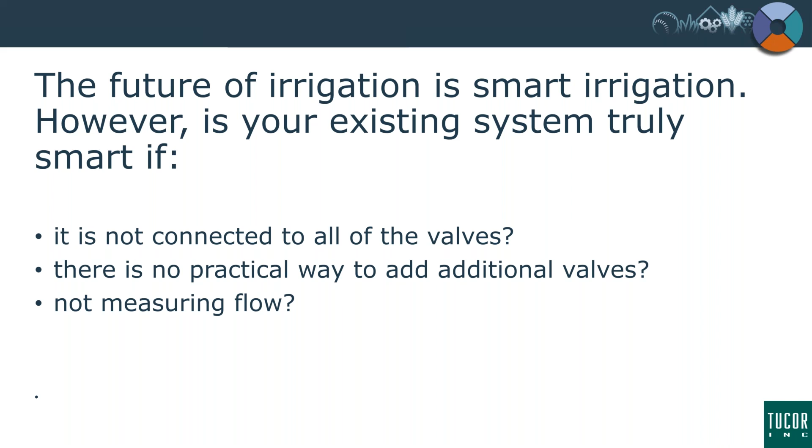What if it's not measuring flow? How smart truly is your smart system if you can't provide against leak detection, if you can't totalize the amount of flow that you're using on a daily, monthly, and annual basis? What if it's measuring flow, but not a high enough resolution at low levels for leak detection? With today's advancement of technologies of the drip and some of these new systems with drip with filter fabrics on them, some of the lower flow emitters, certainly drip systems and green roofs, low-level leak detection is becoming more and more of a concern. And what if you're not able to check the low leaks?

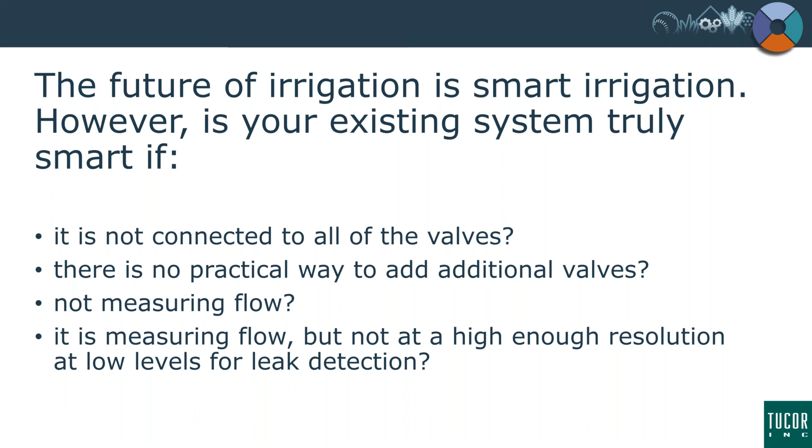So these are the things that we're going to address today. These are the things that Tucor has been working on. Everything from the controller out to help make the controller smart. So let's talk about this. We have 4 general categories that we're going to address today. We have the hybrid 3D system. We have the Nexus Wireless system. We have a new product that we're just introducing to the market currently. It's called the Tucor MultiFlow. And then the 4th category, which we're just finalizing right now, is the FMV, or Flow Meter Master Valve Retrofit Assembly. So let's take a look. Okay.

We have the hybrid 3D, a product where if you have just one good valve, one good wire in the system, we can add our hybrid 3D at your control system and use that existing wire, sharing the field common and adding valves anywhere in the existing irrigation system. Not only can we add valves from that valve box out, but we can connect to a master valve and flow sensor and bring the data back to your controller, all without having to run wire from the controller.

So we have 3 categories. New for us this year is our 3D2, a kit just for master valve and flow. The 3D6 provides for master valve and flow as well, but also allows you to add up to 6 valves in the landscape. The 3D24 again allows for master valve and flow control, but allows you to add 24 valves into the landscape, helping complete systems you couldn't get wires to in the past.

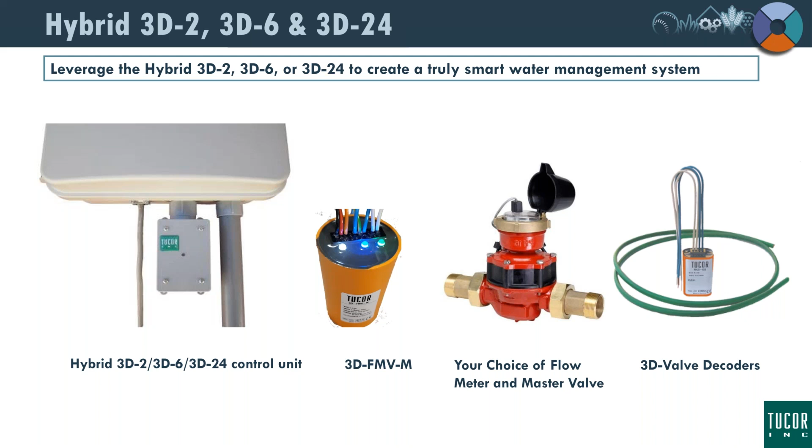So we still need to control that valve. So we give you an assembly that has all of these components.

Our first component, totally new for us this year, is what's called our hybrid 3D FMV Assembly. It comes as a complete kit, with the splices, the transition valve decoder, the combination decoder, and the 3D board itself.

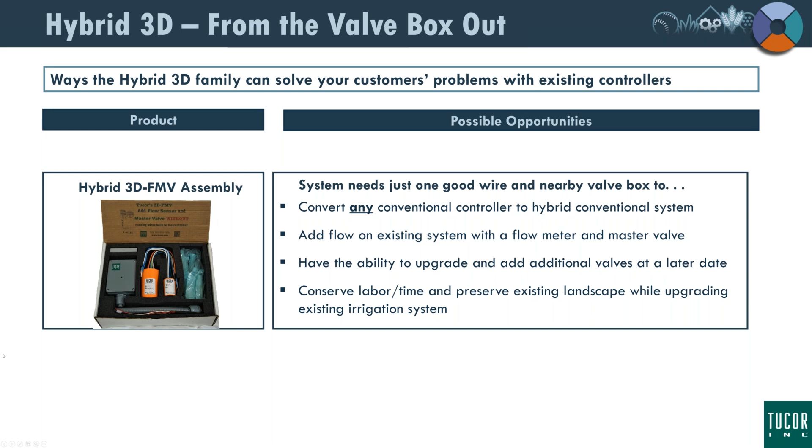There are 2 ways to mount it. One is what's called a snap track, which allows you to hook a raw board to the wall or the interior of your cabinet or controller. Or you can mount it in this IP rated enclosure, and we have a flex conduit that can be cut to any size to fit the application. So that all comes to you as a kit.

The 3D FMV Assembly is shown here in a package that comes in the box, with instructions on the box itself for use.

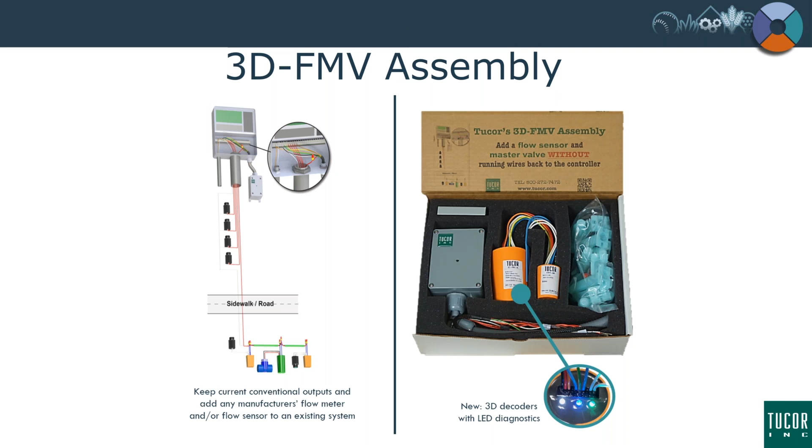We have the 3D6 and the 3D24. Sometimes you don't need to add flow meters and master valves, but just want to add additional valves to your system. Oftentimes I've had as many as 2 of these placed on a controller just to add valves where needed.

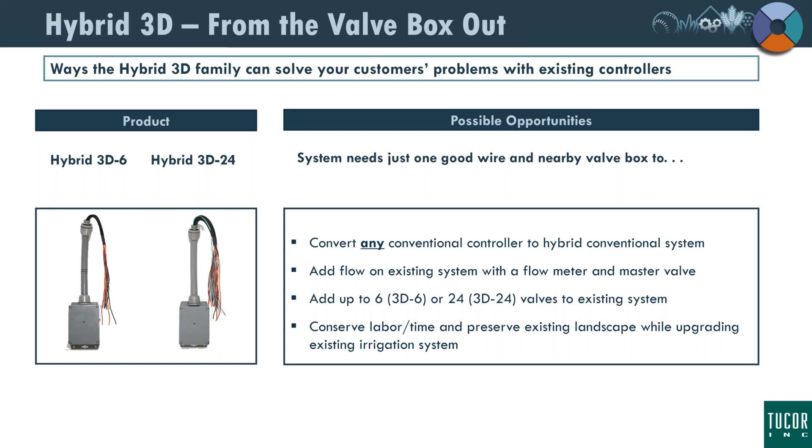So this is kind of a layout, a configuration that shows a typical application. Number 1, what we're showing here is adding a combined flow sensor and master valve by using the existing wires. Here's the controller location. We have all the existing wires to the existing valves. We come down to this last valve because I want to put a flow meter and master valve at the point of connection.

So we end up going to the transition valve right below in this area here. We transition that wire by putting a decoder there. So that valve now has to have a decoder talking to that solenoid, and then we can add a master valve and flow sensor to the system.

The second scenario: we're eliminating a broken wire. I've got one good wire crossing into this median to this island. One wire is broken. All I have to do is go to the valve that's got the good wire, put a transition decoder in, and then add as many valves as I would choose at that point.

We have the ability, if you want—as in this example, assuming your controller has the ability to work independently with an independent schedule that doesn't have influence with the rain shutdown—to actually run lighting features and so forth off of your controller as well, by extending the 2-wire path to it.

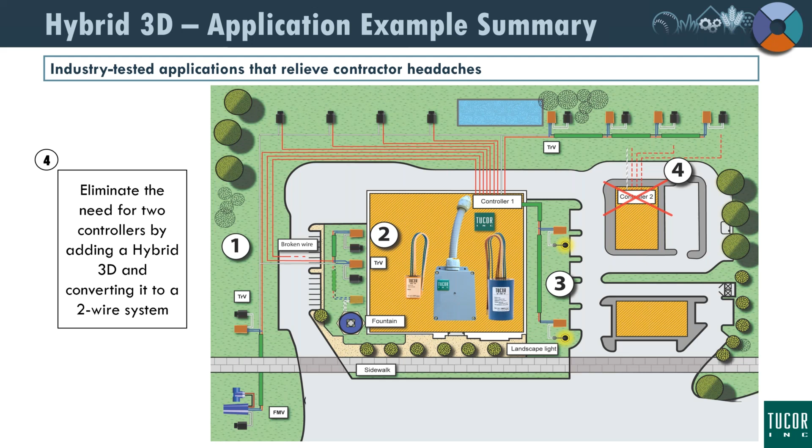In this project, villages in San Jose, they put in 109 of these, and it saved them thousands of dollars in trenching and boring. So that's a perfect example of how you can resurrect projects that otherwise wouldn't be feasible to do.

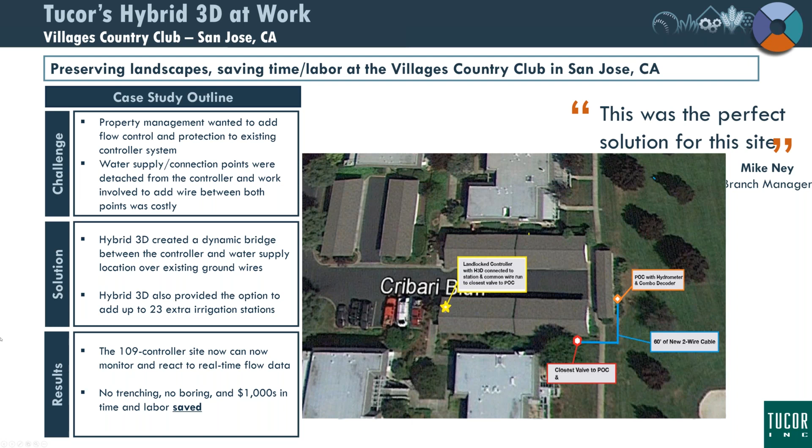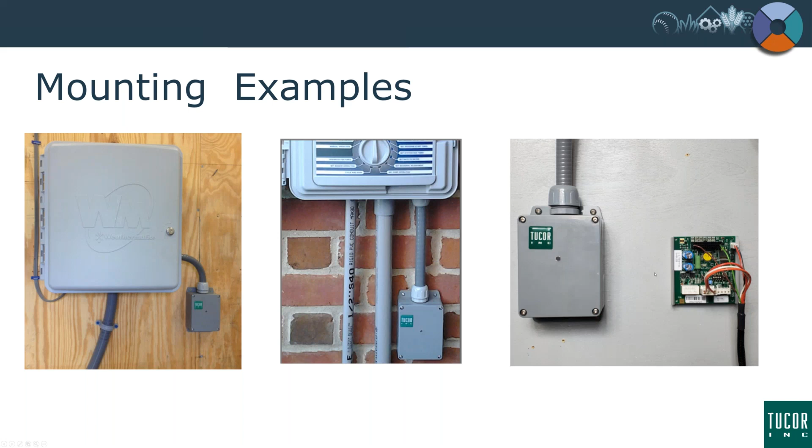We also have what's called a snap track—it's a plastic frame that you can snap the board into and mount it inside your cabinet if space is a constraint. So that's the hybrid 3D.

Think of it this way: on any valve wire in the field, you can add as many valves as your controller has capacity for, up to 23. You can go into multiple valve boxes throughout the site and continue to add valves, as long as the wires going to those valves are good.

Our next product feature is Nexus Wireless. This is a product we've been working with for about 5 years now, and we have a lot of categories within the wireless offering—including wireless flow, which we'll get into a bit more later in the presentation. That's a pretty extensive capability that we have now.

We can add flow—unlike with the 3D, where you had to have one good wire. With our wireless flow capability, we can bring flow in from really anywhere. Our systems have the ability to connect to repeaters, so distances really aren't a concern. Our RKW is our totally wireless controller—wireless to ET, wireless to moisture sensors, wireless to valves, and wireless to flow.

Then we have our wireless valves. All of these products I'm talking about so far can go with any controller, any system—anything in our Nexus platform of products. This is all available to connect to any manufacturer's controller. So with the Nexus Base, I can make any manufacturer's controller connect to wireless valves. We can connect up to 6 wireless valves to any manufacturer's controller.

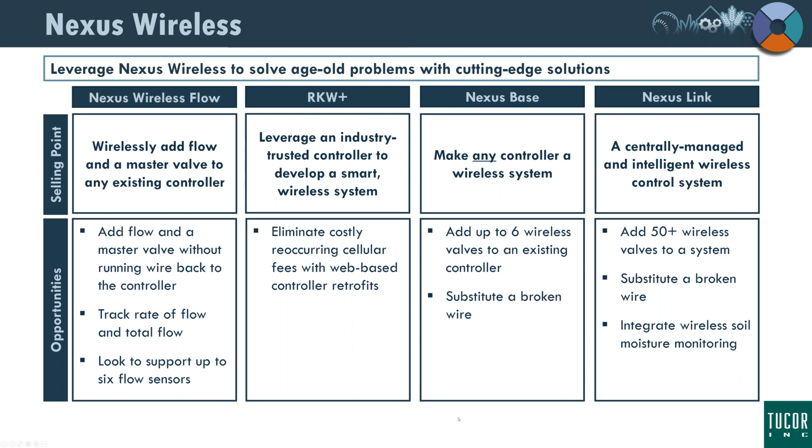So this is kind of the topology of what our Nexus Base looks like. Here at the top in the center, you see the radio gateway that attaches to any controller. It's just a simple terminal strip—any controller's valve output and common connect to this relay, and it actuates the valve through the radio.

These are 900 megahertz, 1 watt radios, and the wireless components could be an above-ground enclosure. We have valve boxes that go in the ground, and this is an example of the radio receiver. All of this equipment has built-in site survey capabilities. Also, we can control a switch or a valve through the same device. I can not only turn on valves in the field, but I can turn on pump starts, master valves—really anything that you need to turn on with a switch, this infrastructure can manage.

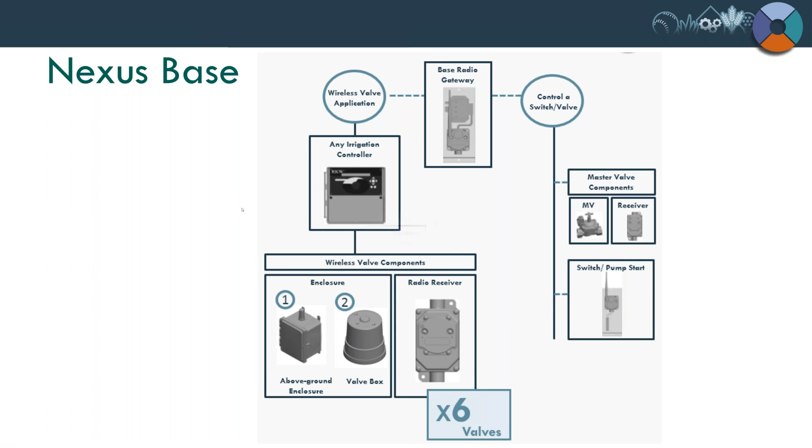Then we go to the Link. The Link is now a little more complicated because we actually have a small PLC in the control environment. We can work through cellular, local networks, or a 900 megahertz Ethernet radio to get this connected to the servers.

While we prefer to put in our own controller because we pre-program and build everything here for large applications, where there's an existing central control system, we would certainly work with you in that situation.

We can do up to 50 plus valves. I have a couple jobs with 60 to 70 valves per gateway. We can also do moisture monitoring for moisture probes. We have probes from 8 to 60 inches in length, up to 5 probes per radio, 20 radios per gateway.

We can do master valves, pump starts. We can bring back flow, pressure, pH, conductivity, humidity. All of this is still within the same radio network. We can strengthen any of these signals through repeaters, up to 4 repeaters, going further and further out into the network.

And then we have, of course, two power sources, one being our 120 volt AC, and solar. We have a project that's got over 28 solar powered repeaters on it.

So this is kind of what you would see as far as equipment's concerned. This is our wireless flow transmitter that you'd find in the field. This is our totally wireless controller. And then this is an example of what our base system would look like: just a conventional controller outputting to a terminal strip, connecting to a radio, out to your valve box. To the right is our Link system, where we have a small programmable controller built into it.

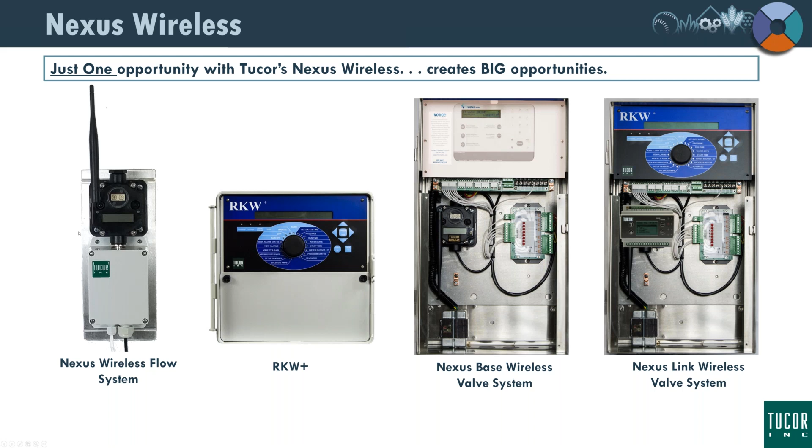Here's an example of a project with one distributor in this country. We've got two projects at two ends of the country. One was an HOA, and these are all going in right now as we speak. An HOA in Florida had 11 controllers. We narrowed it down to one of our 200 station controllers, and that was the first phase to get the control system to where we eliminated their 11 controllers in the field.

Their plan was to change out the valves as they failed over time, because it was a 30 year old HOA. Two months into it, they said, forget it, let's just do the whole thing. So this Friday we will ship the last of 200 wireless valves for that application, which is going in right now.

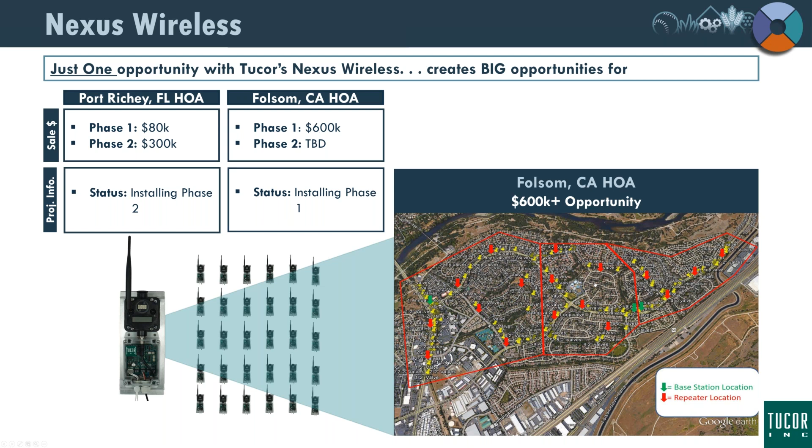Then another project in Folsom, California, the other side of the country. As you can see, it's a fairly large project. It's got the red of the repeaters. It's an HOA, and it's got 11 wireless controllers and 28 repeaters and over 300 wireless valves in that project.

This is an example of what it looks like installed in the field. In this case, as you can see the canal in the background, this is in Phoenix, one of the irrigation canals going through the city, and they're re-landscaping the entire property. There's no power, no access to get power to the controllers, plus the vandalism concern. So as you can see the valve boxes, we place our wireless valve in what's called a Dura dry box adjacent to the valves.

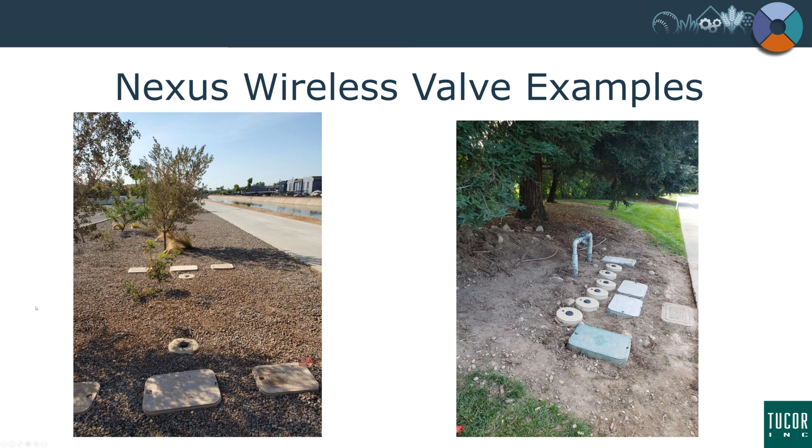To the right here you see an application where it's one valve, one radio, one valve, and so this is just a small example of the 300 units that are going in in California. So that's our wireless valves examples.

Our next product is MultiFlow. We're just releasing this product. The MultiFlow is a universal product, it does a lot of things. It will combine two points of connection and hand it to a controller for those controllers that only have the ability to handle one point of connection. It will also take a flow input and divide it and hand it to two devices.

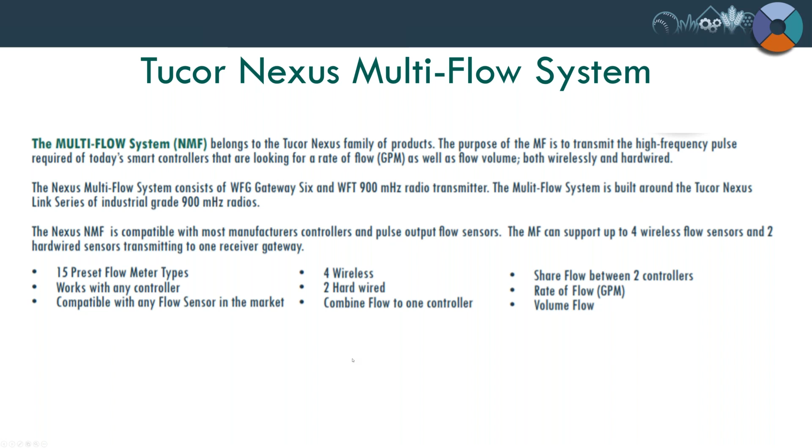So if I have a controller and an injector, and I need to hand flow to both units, it's optically isolated where I can pass that through. I can also manage 4 wireless valves or flow meters and 2 hardwired flow meters, and combine that at the controller. This is a look at how this comes together.

You have the transmitter for your wireless flow. This is the gateway at the controller. This is what it would look like if it was in its own enclosure. We can work with any manufacturer's flow sensors and meters, and we have different topologies where we can do star, point to point, and we can actually put repeaters in where necessary.

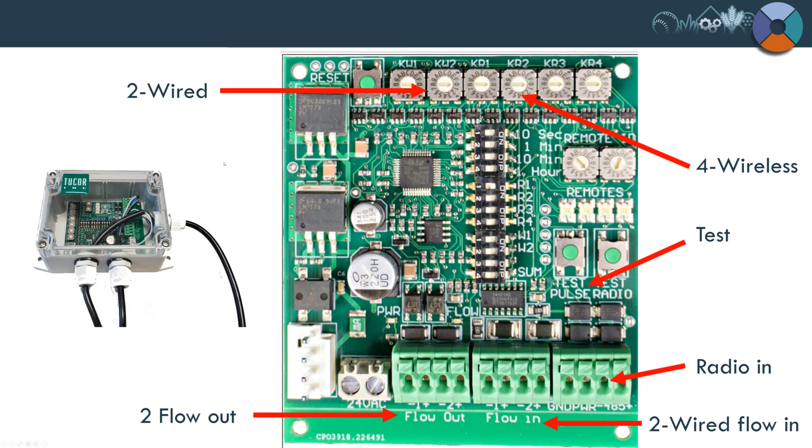So this is kind of a breakdown of what this thing will do, and this is what makes it even that much more unique. You see these 6 switches at the top. The first 2 are for the wired. The other 4 are for wireless.

We actually can hard code in all the K factors and offsets of the various manufacturers' flow sensors. So when we ship it, you tell us what size valve or what size sensor and what manufacturer it is, and the K factors and offsets are already built into it. So you can combine different manufacturers with different sizes in this system.

We have test capabilities where you can test the pulse to the controller to make sure that it's wired correctly. We can test the radio signal if it's using radio to see if it's radioed correctly. And here in the bottom, you see I got 2 flow in where I can hardwire 2 flow sensors, and I got 2 out if I need to send it to a controller and an injector or something of that nature, or even 2 controllers.

So this is what that board looks like in an enclosure, clear or opaque. We also have the ability to then bring in a radio to it if I'm bringing in wireless. So this is all, as I mentioned earlier, products that can be used with anybody's equipment. That's what the whole Nexus line's about.

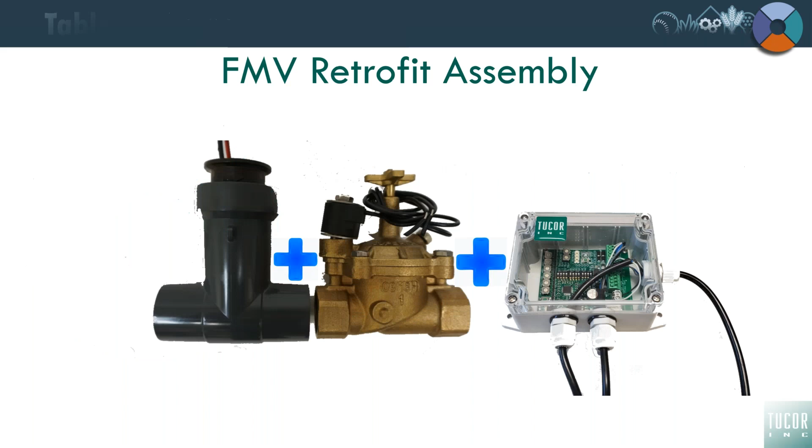So now we're going to talk about a product category that's kind of unique. It's our FMV flow meter master valve retrofit assembly. In essence, what this is, we combine a flow meter, we combine a master valve, and we run that through our MultiFlow board, and we're able to take these custom K factors and offsets and give them to any controller.

And the big difference to all of this, as this assembly comes out, is that we totally eliminate the 10 pipe diameter rule in and the 5 pipe diameter rule out. We actually butt the master valve and flow sensor against each other, and we can pipe directly into it through elbows. We can pipe out through elbows, but we have all of this tested, and each one of these has a unique K factor for our assemblies hard-coded into this board.

So this is a look at the topology of that. We have the master valves that we're working through with Superior. We have the new ultrasonic flow meter, which allows us to have this capability and flexibility of eliminating the 10 and 5 rules, and also helps us pick up absolutely low flows. We can pick up flows from a weeping valve. That's how accurate it is at such low flows.

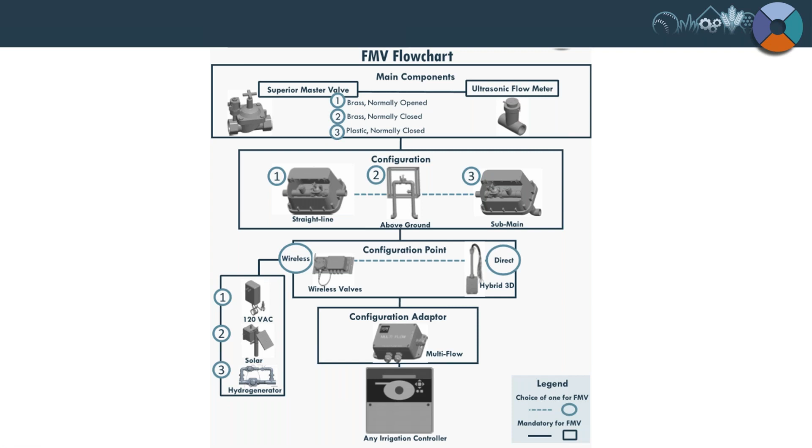So the retrofit assembly is new for us. It combines the ultrasonic flow sensor and brass master valves, and it's designed to be built into confined spaces, all without the 10 and 5 diameter rule. It's available in three configurations currently: inch, inch and a half, 2, and 3.

Each assembly will ship with a wet calibrated ultrasonic flow meter, and a little bit more about what that means here in a few minutes. A brass normally open or normally closed master valve, and either a box or a cage enclosure, however you've configured it, along with the Tucor MultiFlow adapter, which makes all this possible.

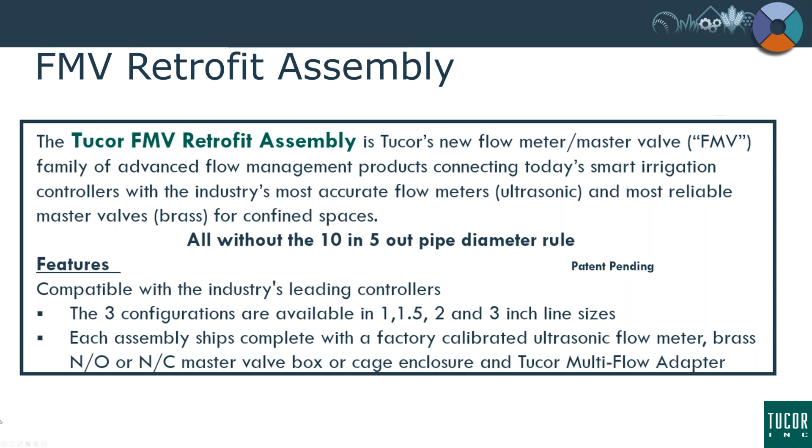So these are the configurations that we're coming out with. We have our straight line for installations where the master valve and flow sensor are directly connected. We eliminate the 10 and 5 diameter rule. Again, it's ideal for tight spaces in a retrofit environment.

For instance, for situations where we need to be above ground, we're out in a park environment where this needs to be above ground in cages near your backflow preventers. The flow sensor is mounted vertically, and the master valve horizontally. Again, it's ideal for tight confined spaces.

And then our third configuration is what we consider and call the submain, where you've got a main line at a lower depth, running vertically and then horizontally straight out of a 90 into the flow sensor, into the master valve, and out. And all of these, as I mentioned earlier, are ideal for retrofit.

And all of this product that we're talking about really addresses the need for the retrofit markets. This is ideal for all of these applications that you have where flow is required, metering is going to be required, and you need to cut it into a confined space.

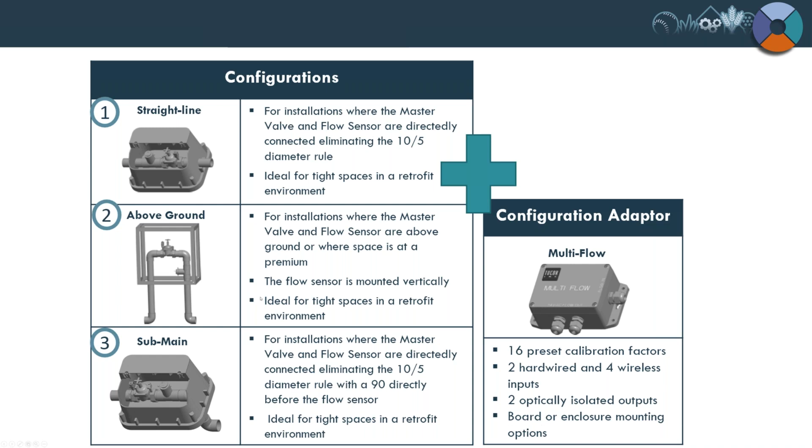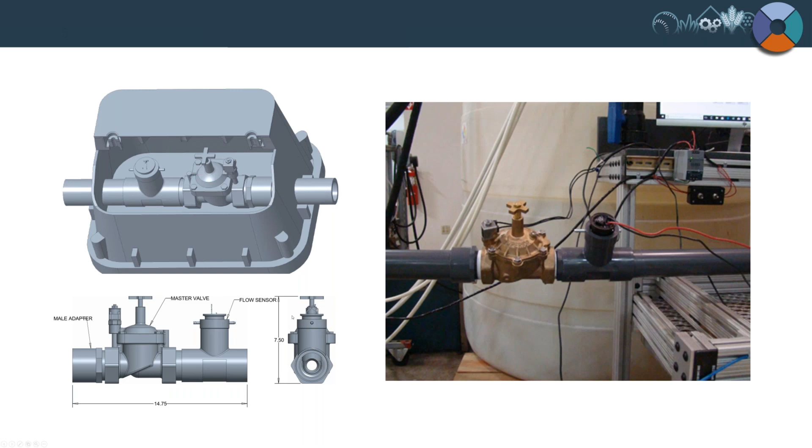So this is all product that's been calibrated, verified, and tested in a lab. This kind of gives you an idea of what a straight-in flow sensor, straight-out master valve is going to look like. It will come in already built as an assembly. We will feature Victaulic couplings for ease of taking them in and out for service. And like I said, this is an example of the testing we've been doing.

Another example is our above ground cage, as I call it, for a lot of the West Coast applications where this is at ground level, this is above ground in the cage. You see, we've been, again, doing testing, and each one of these, of course, as you can imagine, with the various flow distortions coming in and out, generate a different calibration factor.

But the beauty of this ultrasonic technology is it's not impacted by the turbulence that your standard paddle wheels out there currently are. So it's totally new. Well, ultrasonic's not new, but it's new to our industry in that it's now affordable. It's at the same price points as the paddle wheel technology that's out there right now.

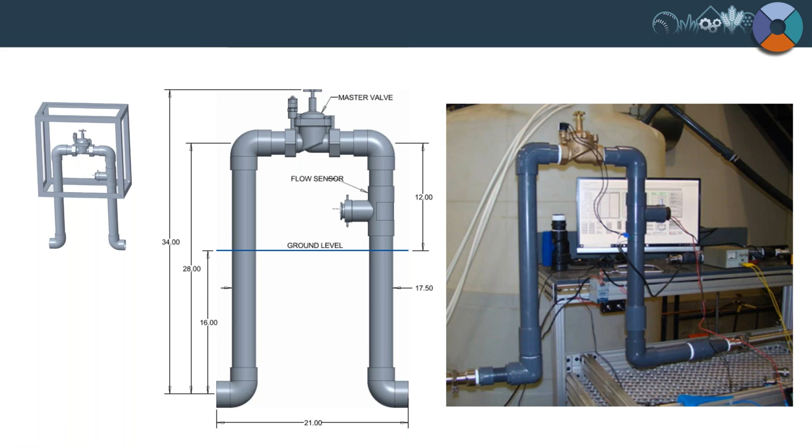And then one final example: we just have a unit with maybe a main line. We're doing a SubMain with a 90. Again, the ultrasonic sensor and master valve.

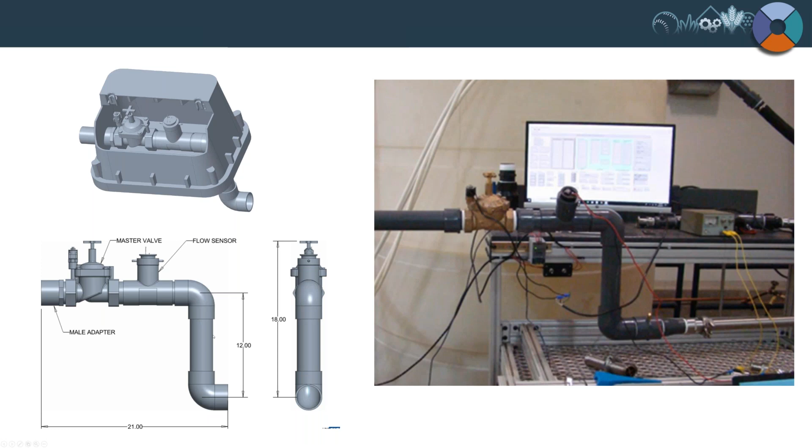Just a little discussion, I guess, on what you're probably accustomed to as opposed to what we can provide for you now. What you're accustomed to, of course, is flow sensing.

You've been looking for broken or missing heads, maybe even nozzles if you have the low flow capability. Certainly line breaks and hopefully leaks if the leak is big enough that your flow sensor is going to pick it up. Clearly, you've been looking for unscheduled flow, any valve breaks. These are all things that we're all accustomed to our sensors providing us.

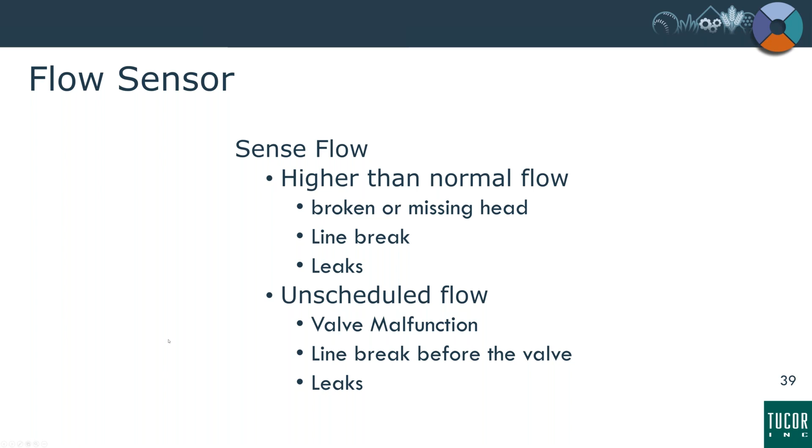Now, what a flow meter does is a little bit different. A flow meter, at least from our perspective, is something that is measuring water on a continuous rate, as opposed to flow sensors. Their calibration is usually at the highest flow rate, and so at low flows, the accuracy for actually determining water usage, water consumption by an agency, is not there.

You know, they call it full scale, and that might be at 30 feet per second. Well, whoever designed an irrigation system, it's at 5 feet per second or less. So that's where the ultrasonic sensors really show themselves, because they're very, very accurate at these very low flows.

So you're going to see more and more water consumption reporting required by a lot of local governments and agencies. The ultrasonic can produce accuracies better than a lot of paddle meters, or the meters that are used for residential and small commercial applications. It's much lower flows for drip lines, for these new technologies coming out with much lower flows than what have been seen before. And now you have to look at control systems. Can they actually record flows in fractions of a gallon as opposed to whole gallons?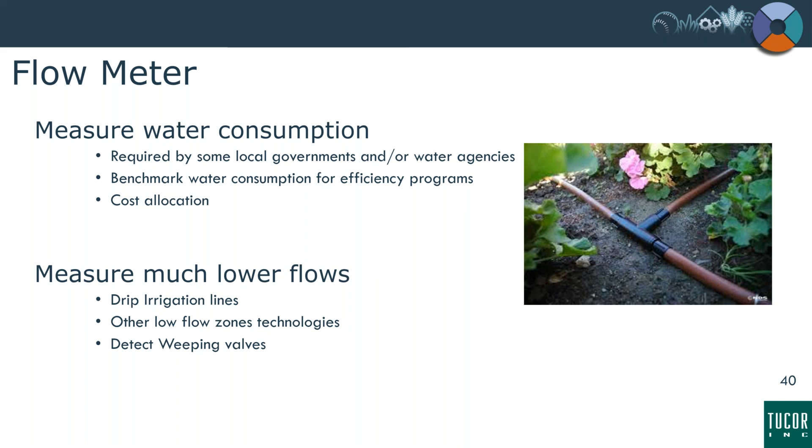So what we're talking about is, is it a flow meter or is it a flow sensor? In some cases, a flow sensor is just fine. You just want to pick up unscheduled flow or a mainline failure. But the future is, in all probability, going to dictate that you're going to have to start recording consumption. It's already mandated in some municipalities.

So a flow meter is accurate across the entire range of its flow, and it's accurate at very, very low flow rates. It picks up very low flow rates. It's wet calibrated. Each ultrasonic flow sensor is actually calibrated in the factory before it's shipped.

So it's ideal for low flow detection, and it's very accurate, as opposed to a paddle style sensor that is rated at full scale, as I mentioned earlier, and full scale is at the far end of the range. If you turn a system on and run it full flow the entire time, that's probably good. But as you well know, in most of these irrigation systems you design, the flow's all over the place. Low flow, high flow, and back and forth.

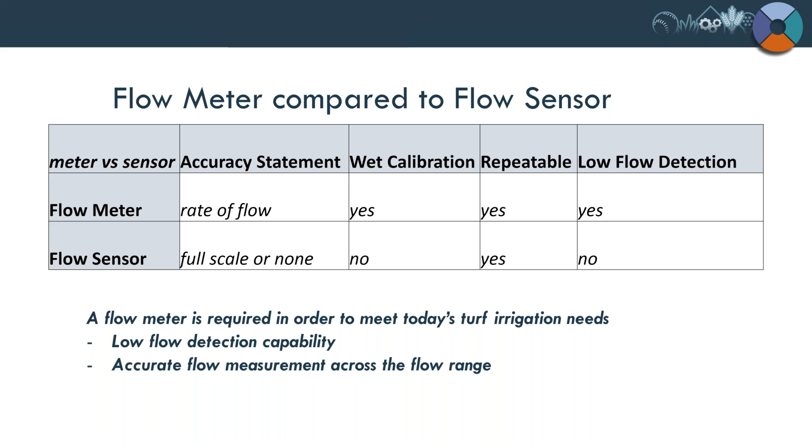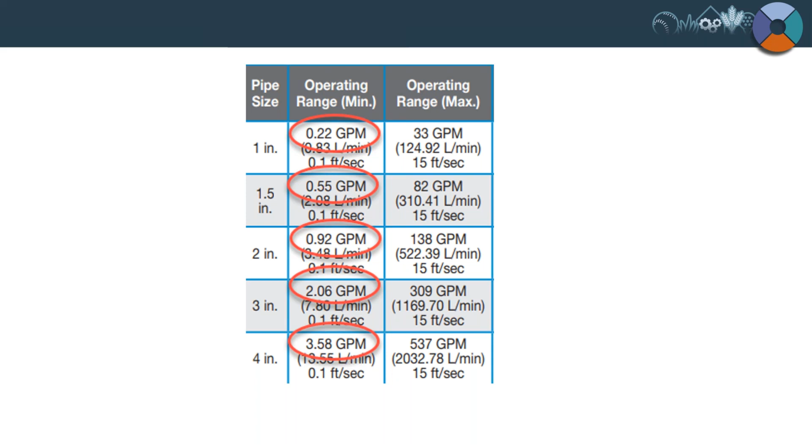So it's very, very accurate to low flows, allowing us to pick up, as I mentioned earlier, leaks that you couldn't pick up in the past. It's one thing for a valve to close on a rock or some debris, you're going to get a lot of flow. But if you've got a diaphragm that's worn, or pebbles sitting on a diaphragm, this is what's going to pick that up for you. So a little bit about these ultrasonic flow sensors.

Higher accuracy. This is 2% across the entire range of the flow, not the full scale or the full end of the range of the meter. Fractional gallons per minute, as I just showed you. It's made as an insert to replace the systems out there that have inserts. There's no moving parts. If nothing else, that in itself is a reason to take a look at these ultrasonic flow sensors. And I think you're all going to see more and more of this. It's starting to really hit the street now pretty hard. So this will become a household term in the near future.

Leak detection down to, like I say, 1/10 of a foot per second or lower in some cases. And then it's got diagnostics built into it, just as our 3Ds do, where you've got a light for connection and a light for activity. And it's NSF certified for potable water applications. That's how accurate it is. And you're going to start to see more and more of that.

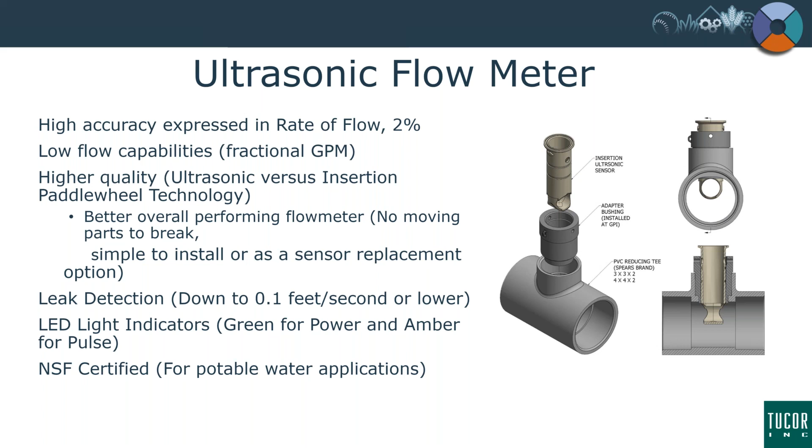And then to wrap this up, we've partnered with Superior on their master valves. They've been in business, I believe, about 80 years. So we have the opportunity to provide a normally closed, normally open, purple cross handles for applications that need that.

They have valves that have a no minimum flow feature, because in the past you always had to have a certain amount of flow for a valve to actually work. So in these low flow environments that we're talking about, there's an opportunity for minimum flow to no flow valves. And they've got pressure regulation built in where needed as well.

So we've partnered with some of the very best technology, some of the newest technology, to be able to bring you this new retrofit assembly. And we're pretty excited about it. And we're just coming to market here within the next couple of weeks with this completed assembly. So that wraps what I have for today's conversation. So I believe it's open for questions at this point.